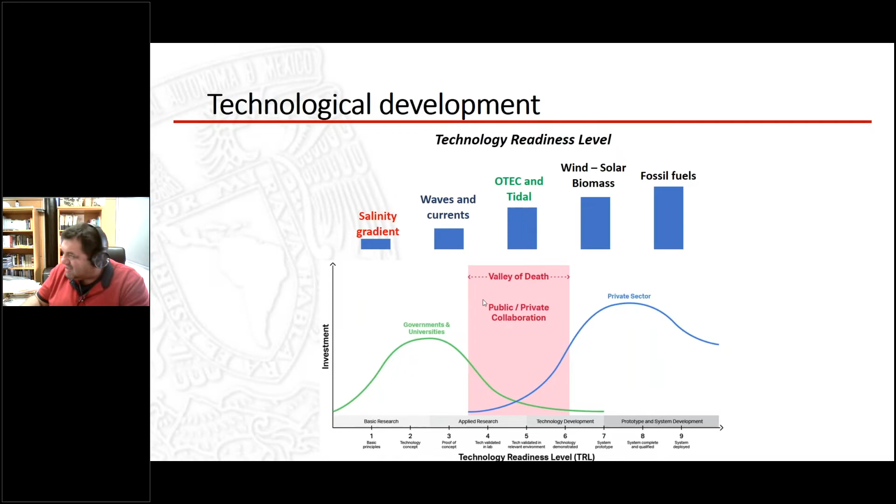In Mexico it is almost private sector, but maybe if we can collaborate with some international partners, we will be able to do so with fundings from different sources. So that's more or less the state in which we are now.

As a summary, separating by energy source in the marine context, this can apply to a lot of countries, but it's mainly focused on how we see things in Mexico. The technologies to convert tidal energy are more or less developed, so we can more or less easily walk into real demonstration and implementation of projects. For marine currents and waves and OTEC, it is probably two steps behind, and we are developing the technologies and trying to grow in maturity, each of them. Probably salinity gradient is the least in development, because it's the youngest technology, and we have some projects, but in an incipient stage.

So we are trying to find a way to accelerate all the technologies and all the sources, to be able to offer to our authorities as soon as possible some percentage of the electric matrix of the country supplied by marine energy.

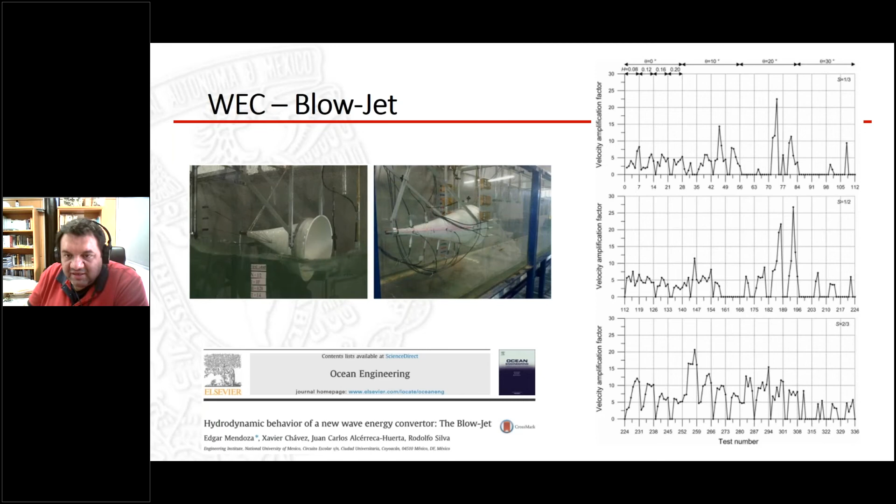The idea is to have a Venturi system in which the velocity of the flow going into the device could be double or triple at the output, and then have a turbine to generate. This is a very simple concept that can work in several places, fixed to a breakwater, or that can also be independently floating. Another WEC we worked on was an oscillating water column.

Which is not a single column, but the idea of this device is to have several columns connected or interconnected, so that one can get the best from the pressure inside each chamber, instead of having independent chambers that can not use some part of the energy. In this case, we are looking for an arrangement that can distribute the pressure and generation all along the chambers and have a better efficiency of all of them.

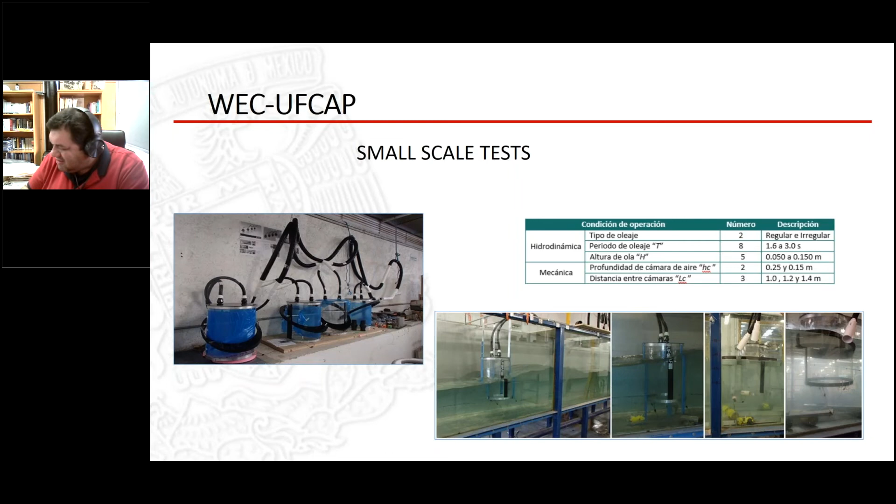As I was saying at the very beginning, these two concepts are reaching a maturity or readiness level between 2 and 3, and we are trying to develop them. Some other ideas: this is another oscillating water column that has inside a Wells turbine, so this is not getting benefit from the air pressure, but from the water movement.

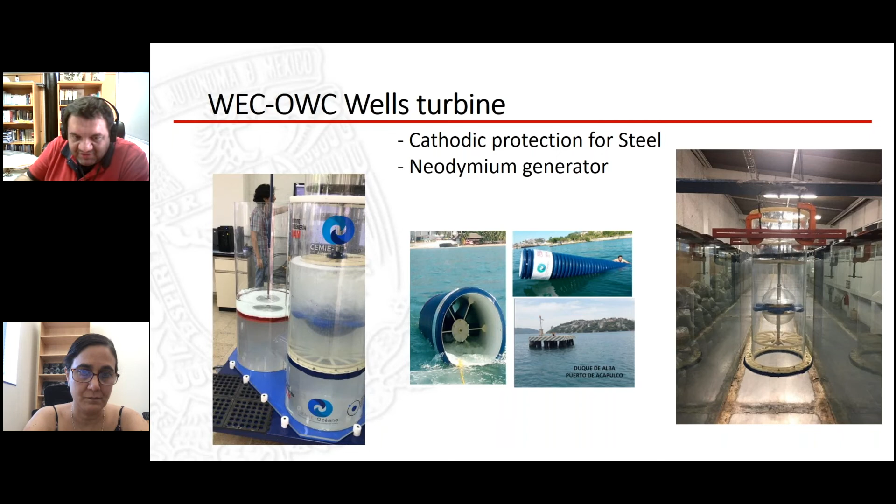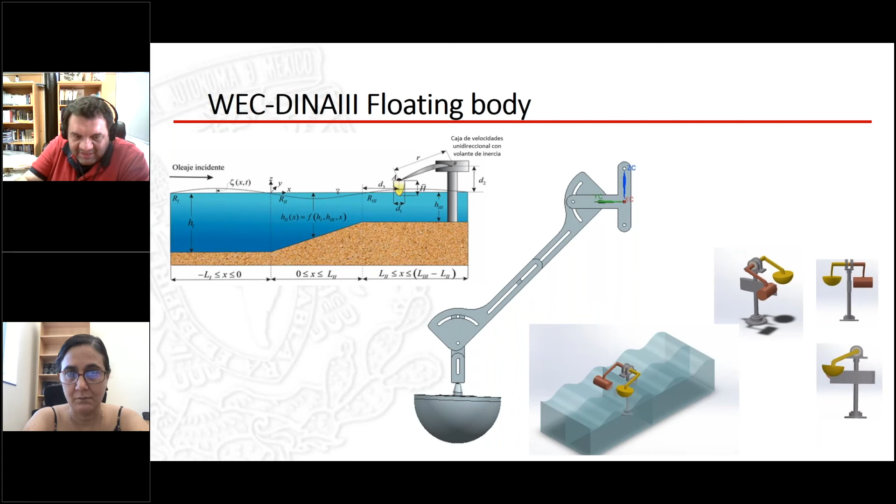We have also developed another floating device that is attached to an arm, and with the up and down movement can generate electricity. We are testing different shapes and geometries of the floating body.

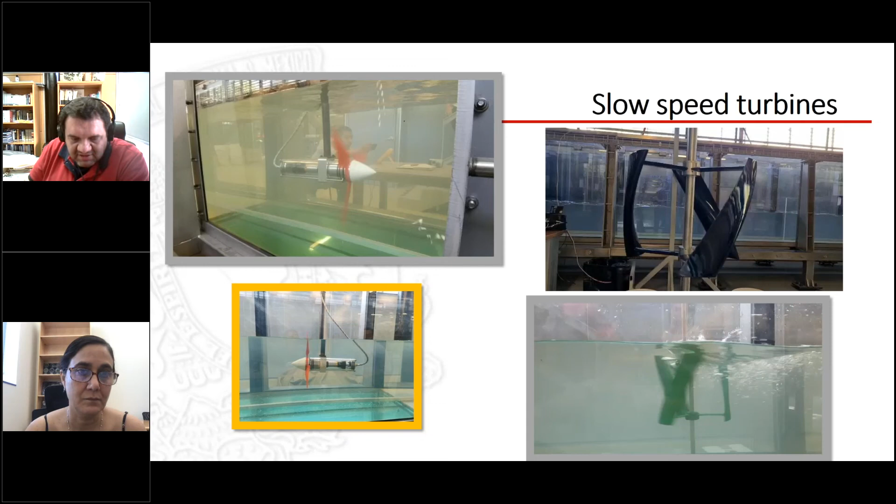Regarding marine currents, we are working on turbines specifically designed for slow speeds, which are the ones mostly found in Mexico, in the Caribbean Sea, and also in the Pacific. We are also working on the design of turbines with the principle of biomimetics, trying to reproduce for the blade of the turbines the wing of the auk bird, which is a bird very similar to a penguin but not of the penguin family. This is a bird that can fly in the air and also fly in the water, so we are doing some work to replicate the shape of its wings into the blades of a turbine.

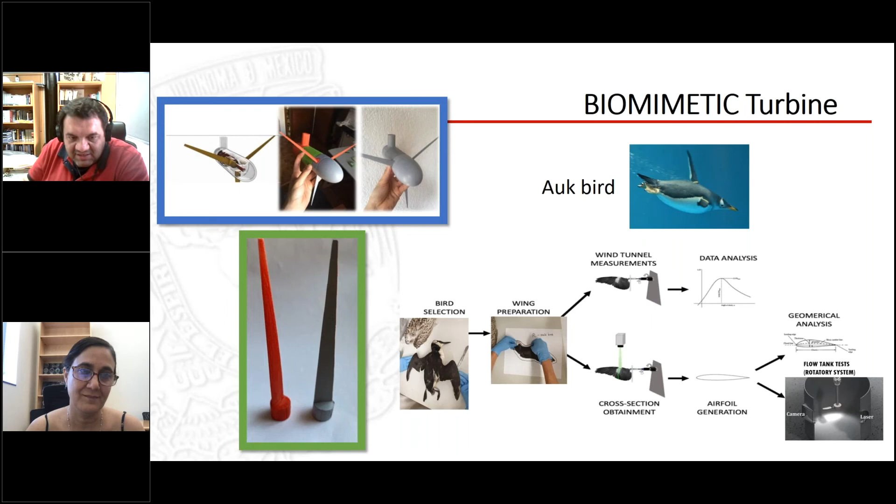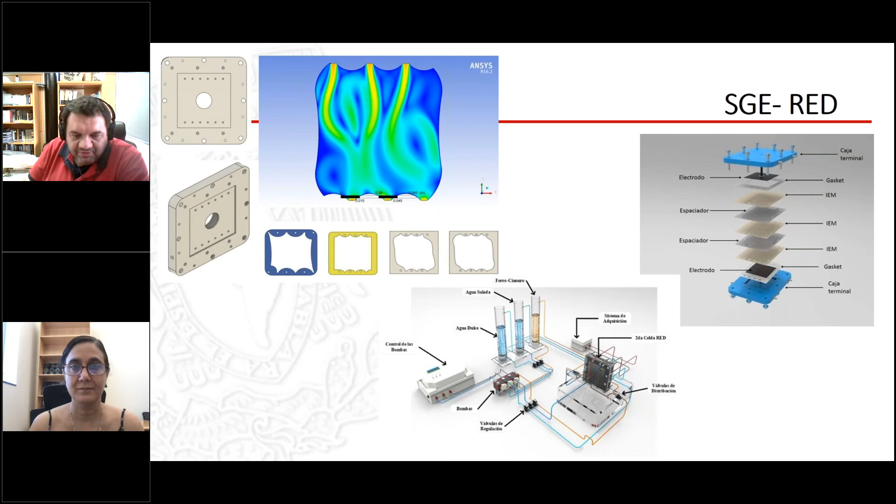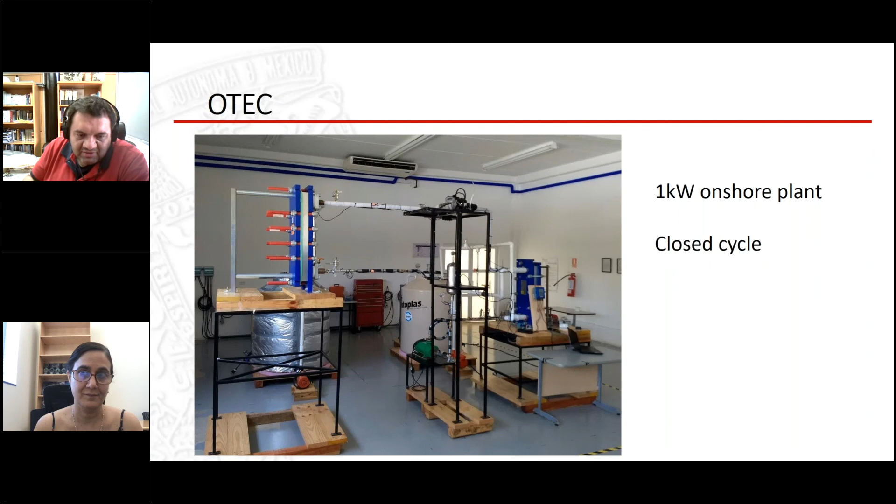As I was saying at the beginning, we are also developing a reverse electrodialysis plant for salinity gradient conversion, which is part of our basic research and will very promptly be coming into development. In Cozumel Island, we have almost working an OTEC plant of 1 kilowatt, placed onshore. It's a closed cycle, and this plant is going to be used for research and development, and to show that OTEC technology can be set in Mexico.

We have some ongoing work, mainly related to upscaling all these projects and putting all these ideas into readiness levels from 5 to 7, ready to expect private investment. I want to stress that our group at CEMIE-Océano is also working very hard on materials and coatings for corrosion resistance of our ideas and devices.

The time was very short, so I could just make a very simple panorama, but there is my email, and any question we can answer at the end. Thank you very much for your attention.